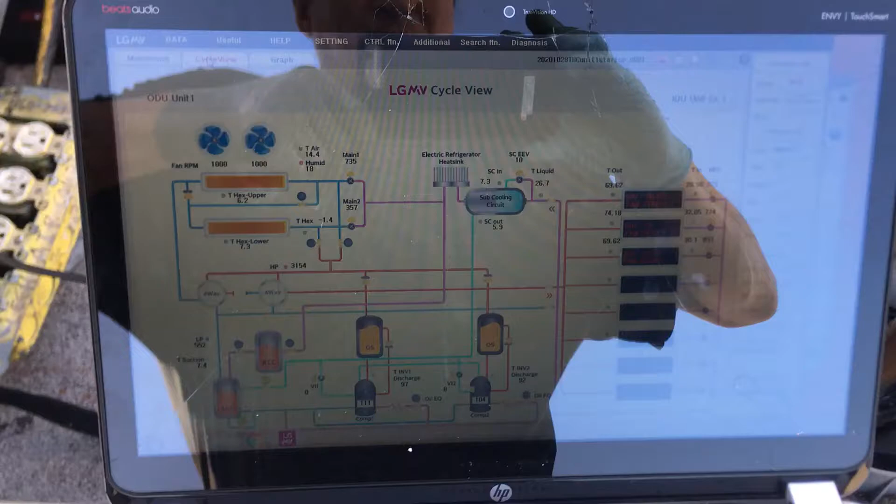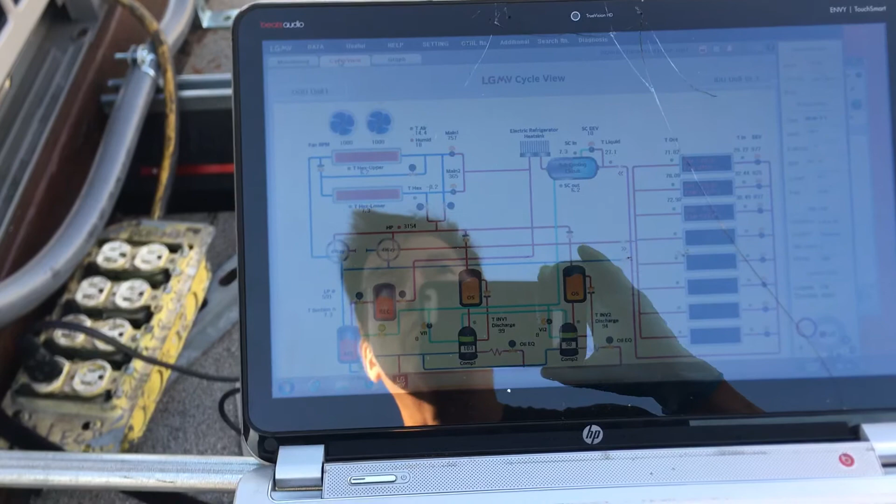Sorry for the glare, but we're out here in the sun. So we have it in heat mode, and as you can see, the compressors are being ran a little over 100% for their duty cycle there, or they're on their VFDs. We're cranking the hell out of this just to stress test it, as you could say. We also have almost 50,000 watts of heating going on inside that room, adding extra heat to the room. We're really trying to get it up fast.

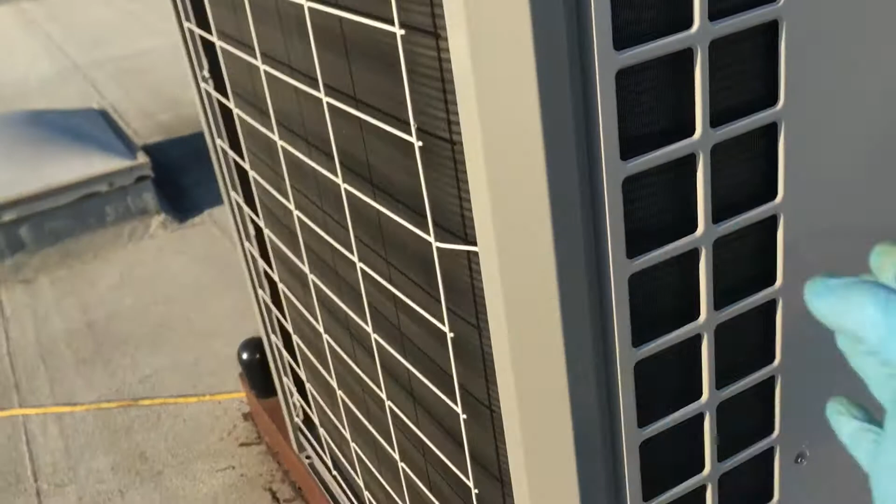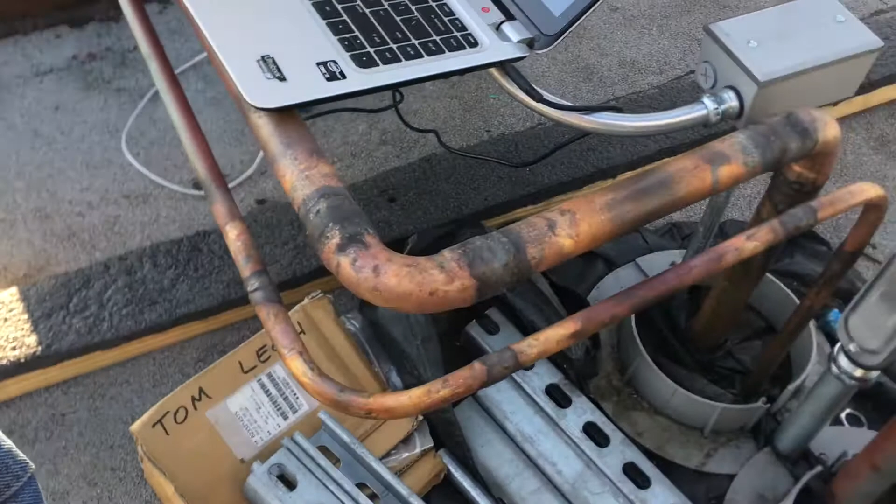Smooth as hell. Super smooth, super quiet. The compressors, 2 compressors in there, are both being overran. Vibration free. And as you see, I don't have the insulation on here. Pipe's nice and hot, because before I finish the insulation and taping it all up, I run the unit for a few days, cycling it on and off, going between hot and cold, get my leak detector out, and go over all my joints in my whole entire system before I cover it up.

Even though you may pass a leak test and everything like that before you finish the job, cycle it through hot and cold, make this cold, make this hot. Keep going back and forth and testing your system. Leak check it one more time before you close it up, then give your good bill of health. And you did your due diligence, and you did everything you could possibly do to make sure you have a lifetime brazing system that won't leak. After that, there's nothing you can do anymore.

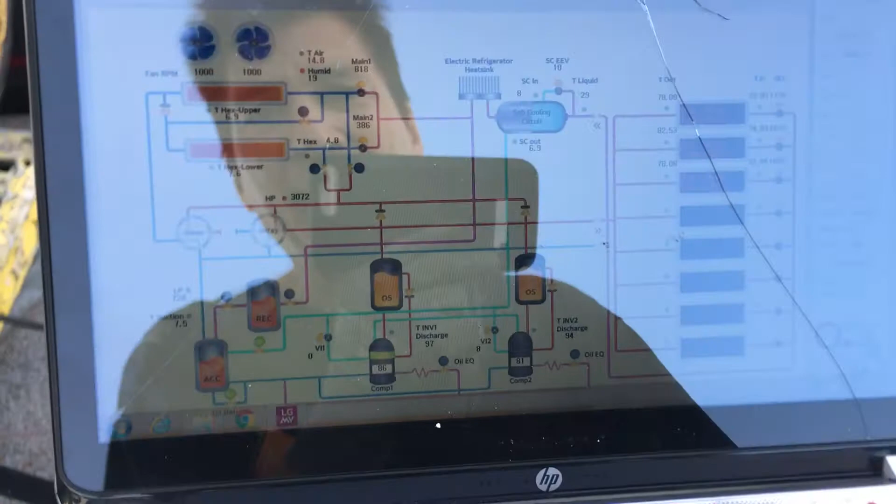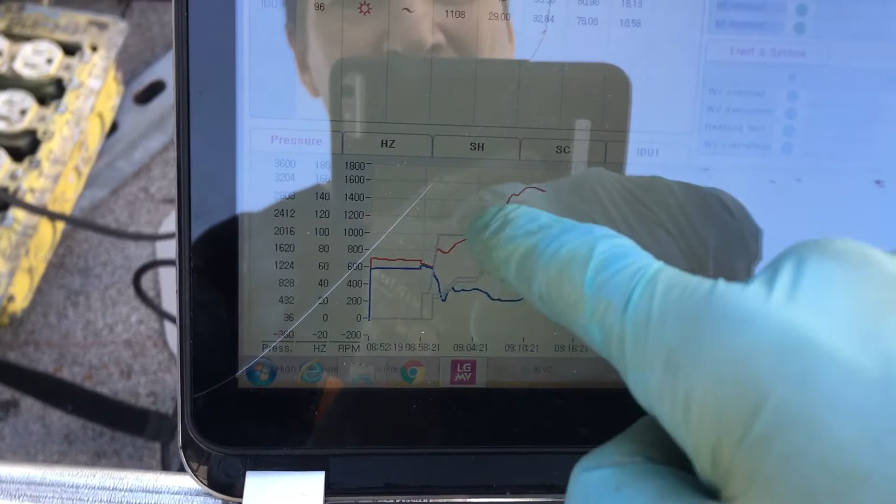We get our oil temperature. We can see our compressors are winding down now. We're about at 86 because it's satisfying. It's getting close to the 86 degrees that was in there. Graphing. Where's our time graph? Don't have that on. Oh, there we go. See, when we started them up, it ramped up, coming down. Oh. I hear them slowing down some more. We'll see. We got a lot more tests to do on this thing.